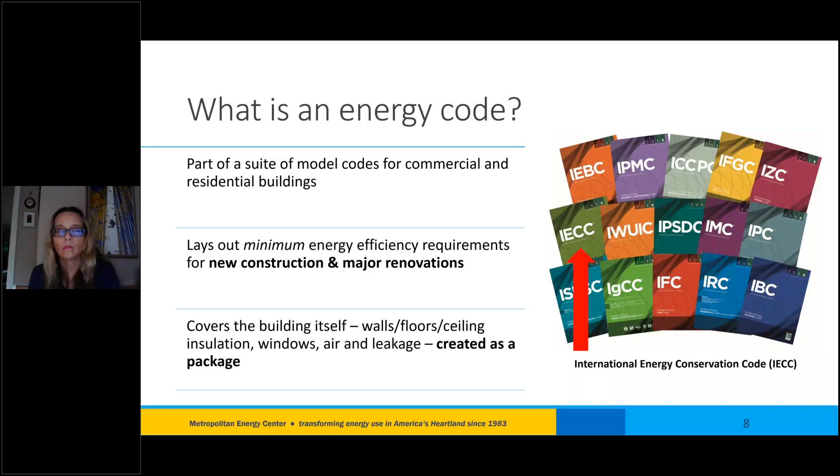And what's really important about this is a lot of these things, once a home or building is built, you cannot see them anymore. And it's very hard and expensive to go in and make some of these updates. It's much more efficient to do it up front. Also keep in mind that it is created as a package. So if you change one thing in the Energy Code, like insulation, that's going to impact other things like testing requirements.

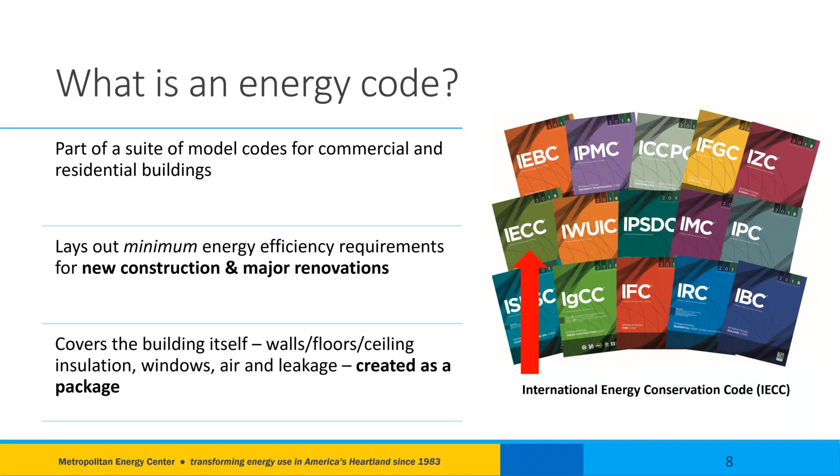It's developed as a package, and these are also minimum requirements. So if your municipality or state want to go above and beyond with their energy code, they can certainly do so, but this is just a minimum guide. And I'll share shortly: okay, we have this energy code we're supposed to follow, but where does it come from?

So the US DOE updates these codes every 3 years, and it takes about 3 years to update. They're currently in the process of finalizing the 2024 suite of building codes, which includes the 2024 energy code. So that's a very long process. And actually, any interested party can participate by submitting proposals and testifying, and then certain individuals have voting power.

Now that's changed a little over the years, but I know at one point when they were having some meetings in DC about the codes, a Johnson County official was headed there to give input and vote. So this is something that is constantly being updated. And then once it is finalized, the DOE determines, okay, this is the national code for the next 3 years.

So again, everyone kind of has an idea during those 3 years what the new code is going to look like. It's definitely not a surprise. Again, any interested party can provide comments. And so once the DOE says, okay, here are the codes, the authority having jurisdiction, the state, county, or municipality, can adopt them and enforce them whenever they would like.

So jurisdictions can also modify or amend those codes. So some states adopt a statewide code. For example, Nebraska, they have a statewide building code, including energy codes. But as you all probably know, Kansas and Missouri are 2 of 8 home rule states. So our codes are adopted at the local level. And so they can also amend those as they see fit.

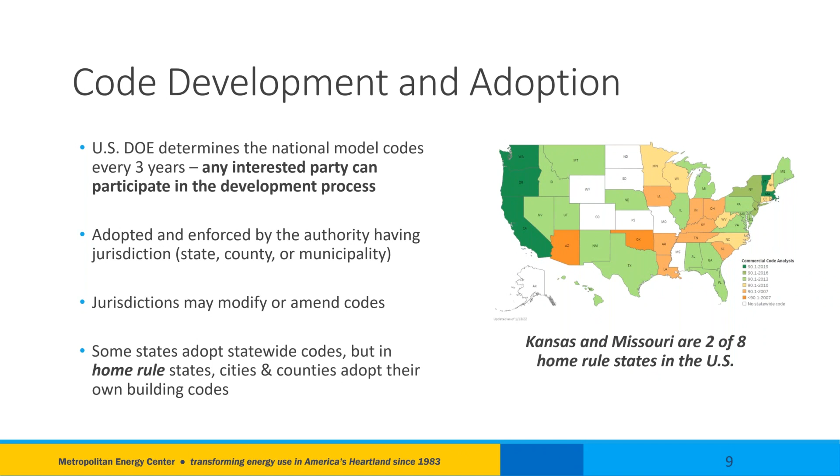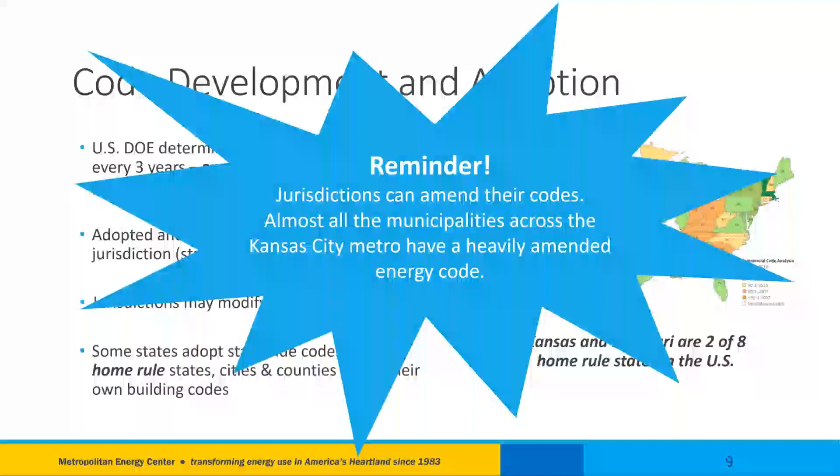But again, just a reminder, when you start making amendments, other things are impacted and you might not qualify for certain funding. So maybe your municipality says it has the 2018 energy code, but that code can be amended to basically a 2009 code. And across the Kansas City Metro, besides KC-Mo, all the municipality codes are heavily amended. So most of them say 2018, but have amendments that really knock down their efficiency. That's just something to keep in mind, the amendment portion.

So now that I've talked about how they're developed, I'll hand it over to Mary to talk about the impact of the energy code. Thank you, Emily. That was great. Okay, so just a couple of slides to visualize how the energy codes reflect best practice.

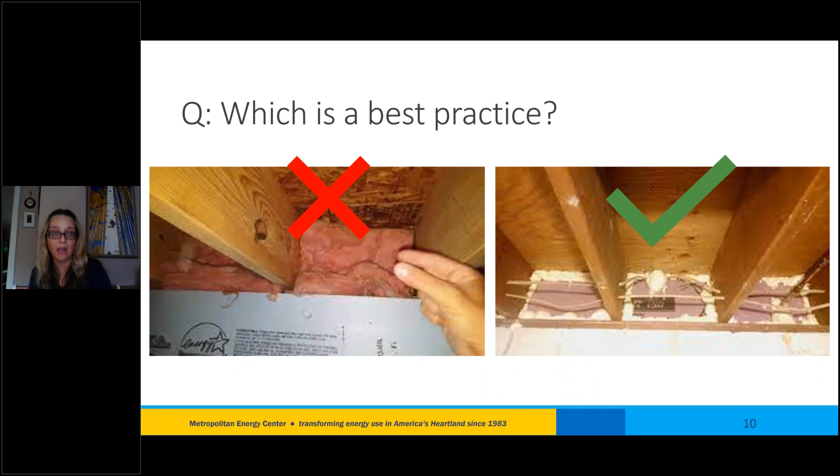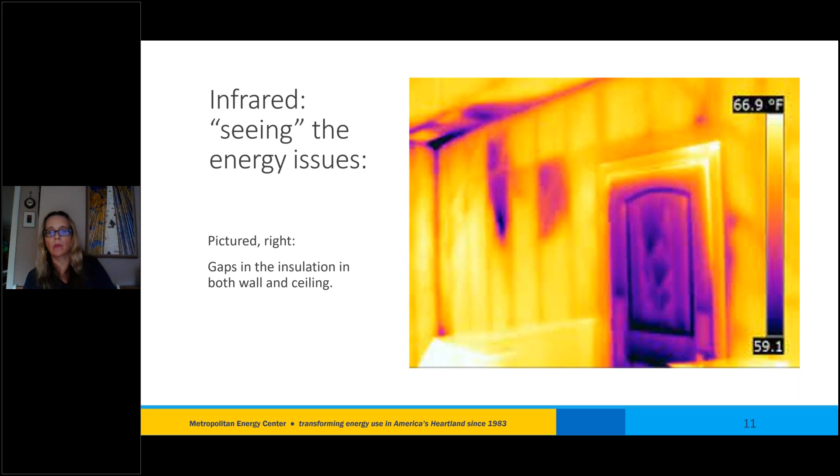And so policy can change this. With the 2021 International Energy Code that Kansas City passed, these walls are not allowed. This cannot happen because the code doesn't allow it.

Next slide, please. So the Energy Code has an impact on all of our residents, and constituents for some of you. It ensures that buildings are safe places to work and play and call home. We're going to talk about a report that backs this up. And it protects our most vulnerable residents because it promotes energy equity. So when you have best practices being used in new buildings, it prevents renters from having to put up with a building that was built with poor code. And that promotes that equity that we a lot of times don't think of when we talk about affordable housing.

We just talk about rent and mortgage, and really the affordable housing definition needs to include utilities, because renters usually are going to be paying the utilities directly, and the landlord's cut out of that process and may not understand that the building needs energy efficiency upgrades. So this is just a few examples. We're going to get into some more specifics here. And just a note, our building stock in Kansas City is outdated. There is a lot of work that needs to be done on retrofits.

And if there is a gut retrofit, the new building energy code will apply. So that's helpful. And our buildings, and actually the most recent figures show closer to 70%, are our greenhouse gas budget in the Kansas City region across the metro, or more than 60, like around 66% of our greenhouse gas budget. And then again, almost half of our residents are renters. So again, policy is there to protect not just the home buyer for a better home, but the renter for a comfortable, safe place to live.

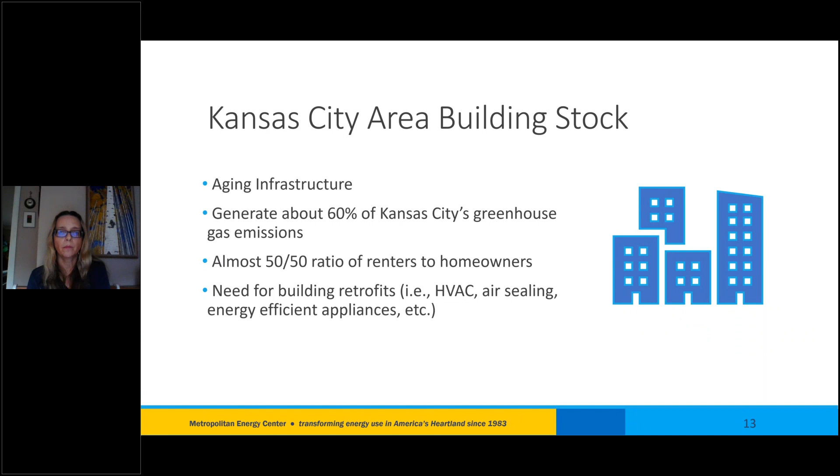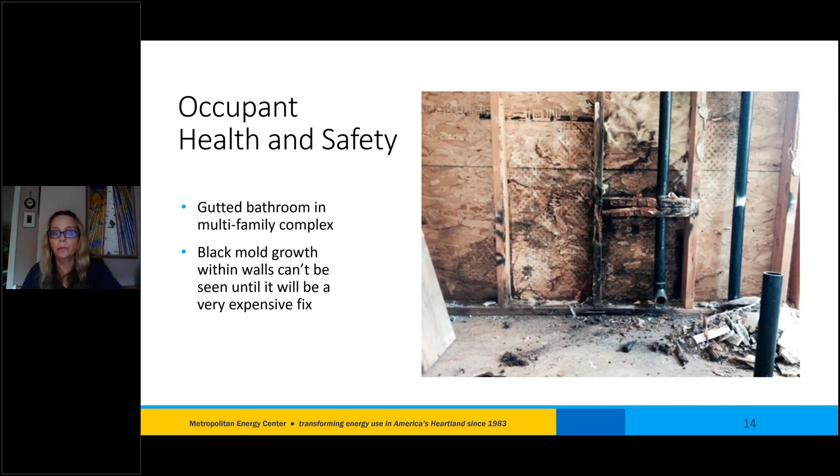And in fact, we have an example here in Kansas City. I think that's the next slide. Yeah. So I don't know how many of you drive by the old, I call it old, but it's still new and lovely, Woodside Racquet Club. They started a development a few years before the shutdown for a luxury apartment complex. And I used to be a member until COVID killed my membership. And I drove by that building every day and was like, that's not the right way to build a building. But my calls went unanswered.

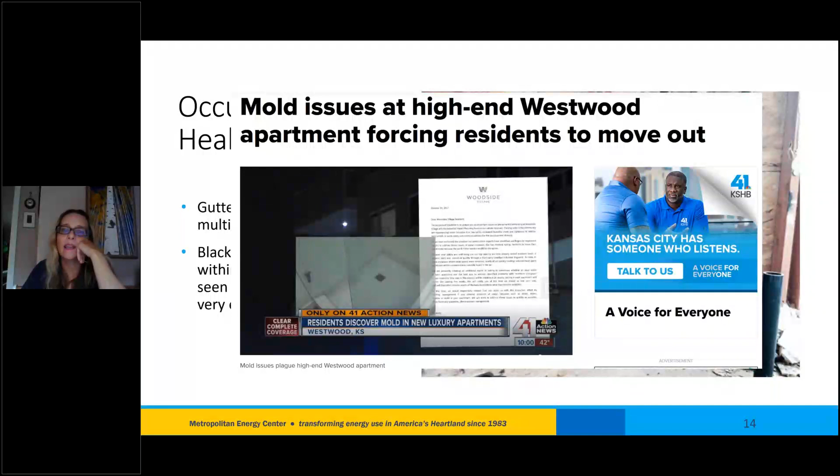So it ended up having mold because the energy code in Westwood was amended to, again, allow things to be structured in a way that ended up having mold growth immediately in the walls, and everybody had to move out and it had to be gutted and redone. So this is a problem, not with old buildings, but with new buildings if we don't have best practices being used in the construction. And then here's another example: mold forced 100 Kansas City, Kansas Community College students out of housing. And again, it's not always attributed to inefficiency, but usually in buildings, especially if you're finding it in the walls, it is attributed to the way that wall was constructed without a good energy code to guide the way.

Next slide, please. And then health and safety. We used to have an example from 2021, might have been 2022, of a Bronx fire that killed 17 people in a high-rise that was freezing. Most of the residents were using space heaters.

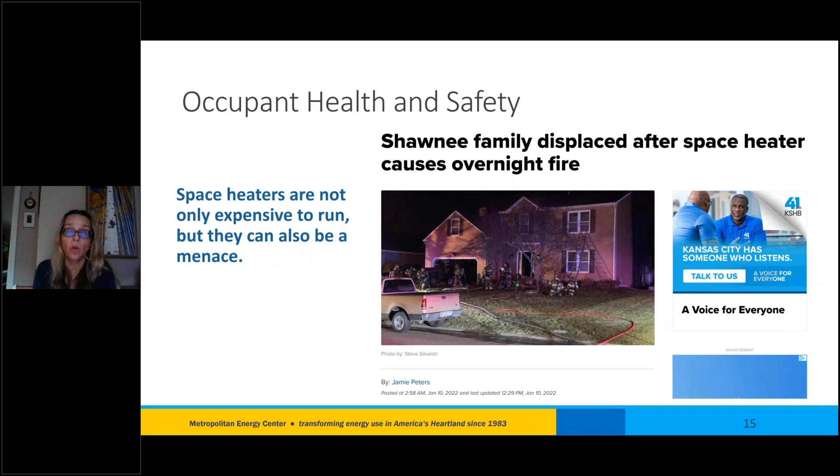Well, most of our homes in Kansas City, again, if you have a bonus room over a garage, you probably know what I'm talking about. It's too hot in the summer, it's too cold in the winter, and we're just used to thinking that this is the way our buildings are, that they're cold and drafty in the winter, and we use space heaters. And space heaters are not just the most expensive way to heat a space, but they're also dangerous. And this is an extreme example, but again, it can be real life or death issues, like the example that happened in the Bronx. But here's one that just happened in our own backyard.

Next slide, please. Okay, I think, am I still going? Okay. Oh yeah, you might be going, just the extreme weather impact of not having the.

Yeah, okay, so FEMA. Really, we have a lot of funding that comes through FEMA for disaster relief, of course, and they are paying attention to this. There's actually going to be money coming through the Inflation Reduction Act, which is throwing money through not-for-profits like ours to get our buildings using best practices and our residents and industry officials trained. And so the goal of FEMA looking ahead is going to be integrating building codes and standards to help our communities with their resiliency. So you're probably hearing about resiliency quite a bit.

So for example, we had 60,000 people after that severe storm moved through in July. I remember very well because my power was out for 3 days from this storm. And I remember looking out my window when it rolled through. I was working from home that morning right before the power went out, and I was heading for the basement because it was scary. Well, it knocked out power for tens of thousands of people.

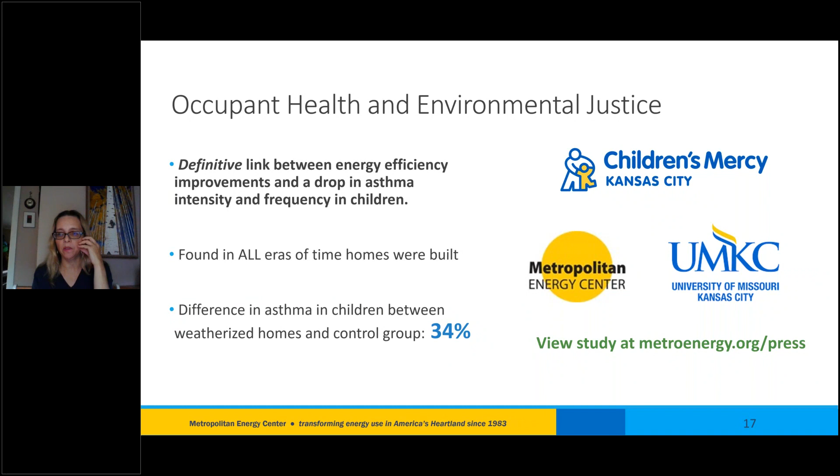I'm not going to say much more to this because I could talk all day about the details. I want to keep this moving along. So I'm done here. Okay, Brittany, you're up.

Great, thanks, Mary. So we're going to kind of shift a little bit into talking about energy and equity. Energy codes, as you know, can have quite an impact on the quality of housing and the amount that folks are paying in their utility costs. And I just want to read the definition of energy equity. Energy equity recognizes that disadvantaged communities have been historically marginalized and overburdened by pollution, underinvestment in clean energy infrastructure, and a lack of access to energy efficient housing and transportation.

And so this is really important because we need to realize that the codes that our buildings have do have an impact on: do people have access to healthy, efficient housing? And is this housing affordable? And the definition of affordable housing is that people are paying no more than 30% of their gross income for housing costs, and that should include utilities. And in today's day and age, we know that that's not quite the case for many people. Some folks are spending well over that 30% of their income on housing. Next slide, please.

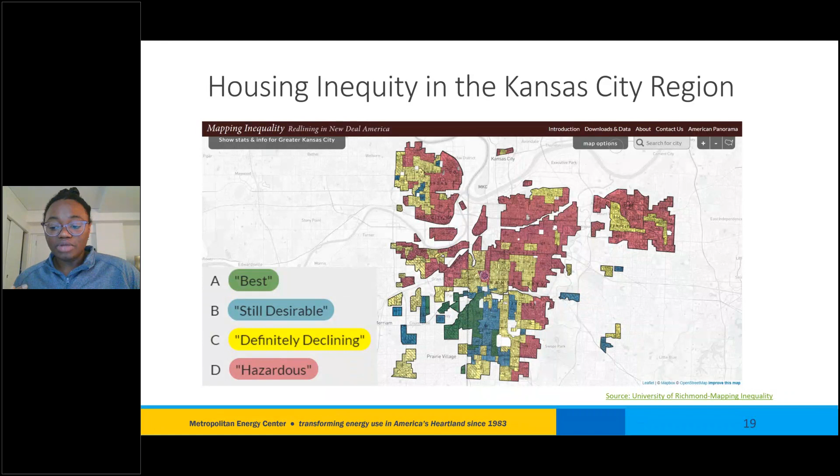And so rent, surprisingly, and you would not have believed this, but in the top 50 metro areas, Kansas City had the biggest year-over-year jump in rent prices. Shocking, I know, for Kansas City. When there's a lot of different metro areas out there, Kansas City had the biggest jump.

And there's also the new time of use plans by Evergy. During peak hours between 4 and 8 p.m., the rate changes from 9 cents to 38 cents in that time frame. And so that can cause some financial issues for folks that are already living paycheck to paycheck and can't necessarily adjust their energy usage. So that's just something that we want to make sure folks are aware of.

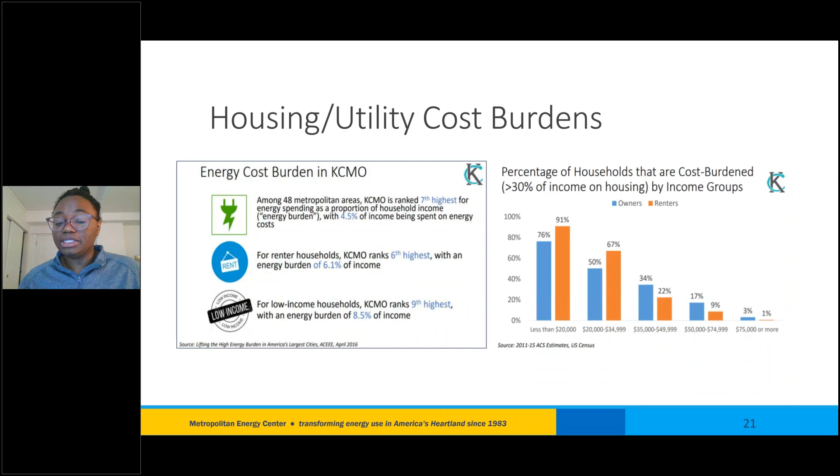So just wanted to show you that folks who are in lower income ranges, they're spending so much of their monthly income on housing. And so building codes are one way to ensure that we can reduce those costs and keep folks healthy. So I'm going to pass it over to Emily.

Thanks, Brittany. Mary's up, but I just want to point out too, I thought before we gave this presentation last time that the high renter number in Kansas City is because of Kansas City, Missouri, but the numbers across the metro, even in areas like Prairie Village and others, are very high as well. So I just want to note that a lot of these renter issues are not unique just to Kansas City, but I'll hand it over to Mary. Thanks, Brittany.

Thank you. Thanks, ladies. Okay, so we get a lot of questions on costs, so we're not going to ignore the topic of construction costs that the Energy Code is rumored to spur. And we're here to say there might be a slight upcharge, but it has been researched ad nauseam by our national lab. Pacific Northwest National Laboratory analyzes the Energy Code for each state. So you can go and find the analysis for any year code compared to the year previous for Kansas or Missouri just by Googling it.

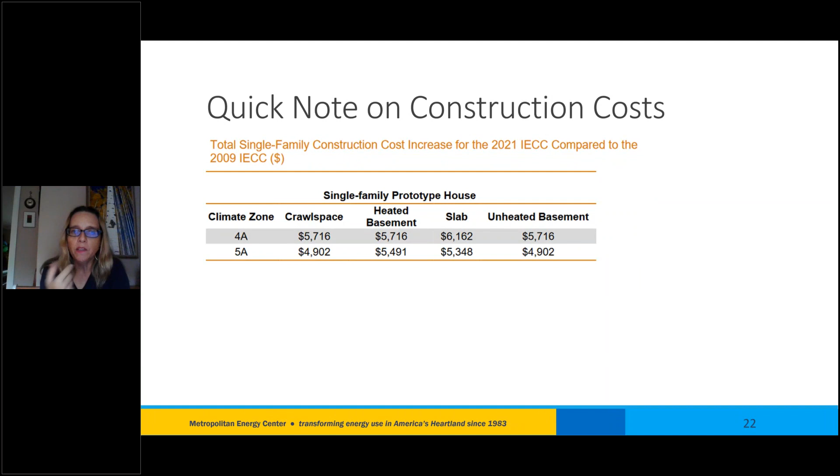And so these tables are from the Kansas report. The top one is talking about raw construction costs. This doesn't have any margin in it. It's just construction for labor and materials. We have 2 climate zones in our region. Most of us are in 4, but north of the river up into the northern parts of our metro, you get into colder climates. And so these are comparing if you have a crawl space foundation, a conditioned basement, a slab on grade, or an unheated basement; for that type of construction, this is the increase.

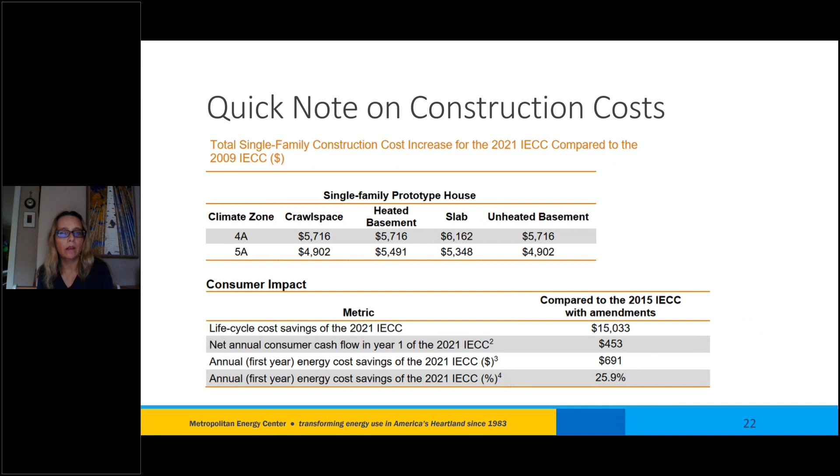And so if you're looking at market rate prices for buildings, this will turn out to be around a 1 to 2% increase. However, the table below it is showing the good stuff for consumers of these homes. Now, this is compared with the 2015 IECC. Even though it's the 2021 code, the comparison was done because a lot of cities have the Energy Code on this 6-year cycle. So the life cycle savings, the annual consumer cash flow, everything is positive when you look at the code. And I know we're running up on time, so I want to make sure I give Emily enough time.

But I also wanted to mention that the Inflation Reduction Act has very robust tax credits per home built to Energy Star certification, which is a really easy extension of building to code, just a checklist. I used to checklist a lot of Energy Star new buildings. So you can get anywhere, depending on the features of the home, $2,500 to $5,000 per property directly to the builder. So already we have ways to offset the cost for the contractor.

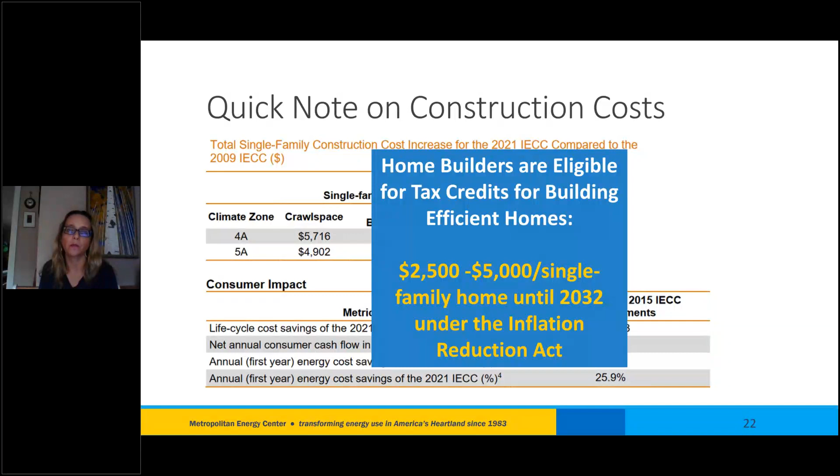And yeah, please, this is a great website to visit to look at the complete list of programs and incentives for your zip code. Just go to that, and we'll send this information to you as well via email.

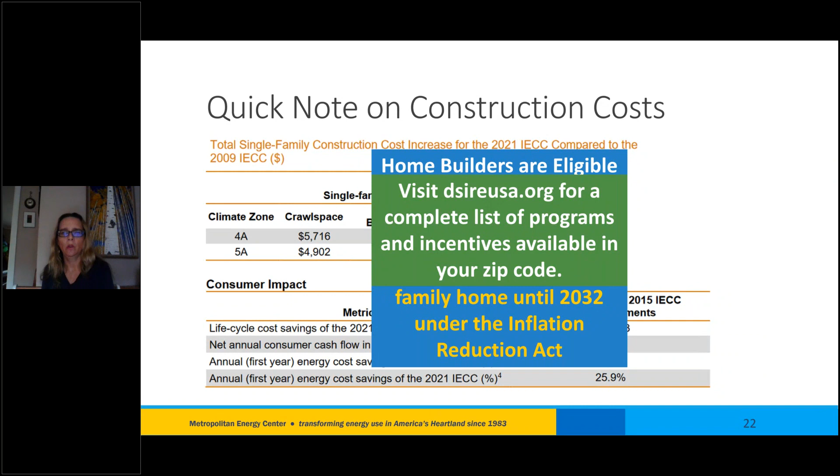And finally, this is because systemic challenges are exacerbating this need to amend. Usually, especially for commercial buildings, the developer is not going to be the same company as the building manager, and so their incentive is to limit costs. So they're not going to see that quick return on investment because they're not managing the building that they're building. Also, systemic challenge, again, the majority of tenants pay the utility bills. And in our region, we don't have very much stick or carrot really to spur building owners to upgrade their existing buildings. That will be enough on that.